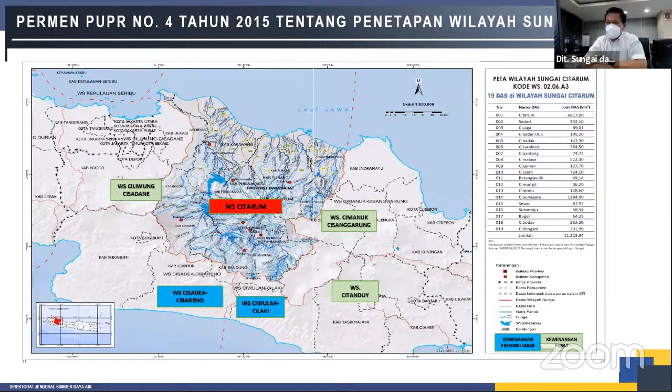Ini adalah wilayah sungai yang ada di Jawa Barat. Kita mempunyai 6 wilayah sungai di Jawa Barat, dan wilayah sungai Citarum adalah yang kita tulis di kotak merah. Wilayah sungai ini memiliki 19 das. Di wilayah Sungai Citarum yang merupakan kewenangan Balai Wilayah Sungai Citarum itu memiliki 19 das, dan di situ ada banyak sekali sungai-sungai mulai dari hulu sampai di hilir.

Di das Citarum atau di wilayah Sungai Citarum itu terdapat potensi air yang cukup besar, yaitu potensi air Sungai Citarum kurang lebih 12 miliar kubik per tahun, namun yang dapat dimanfaatkan hanya 7,65 miliar per tahun dan terbuang ke laut 5,3 miliar per tahun. Untuk 7,65 miliar meter kubik per tahun itu sudah digunakan terutama untuk penyediaan air baku perkotaan lewat bendungan-bendungan yang ada, kemudian lewat intake yang dibangun untuk air baku, kemudian ada pembangkit listrik, kemudian penyediaan air irigasi untuk kedaulatan pangan, kemudian kegiatan perikanan dan kegiatan olahraga dan wisata.

Kita tahu bersama bahwa di Sungai Citarum ada 3 buah waduk, yaitu Waduk Jatiluhur, Cirata, dan Saguling. Keberadaan 3 waduk ini sangat berguna terutama untuk pengendalian banjir di daerah hilir, sehingga di daerah hilir itu air dapat terkontrol melalui waduk-waduk ini. Selain itu di daerah hilir juga mungkin perlu ada penanganan waduk yang lain. Nantinya sementara dikerjakan dan sementara difinalkan untuk desainnya adalah Waduk Cibeet, di mana Waduk Cibeet itu nantinya akan meredam banjir di daerah Bekasi dan daerah Karawang.

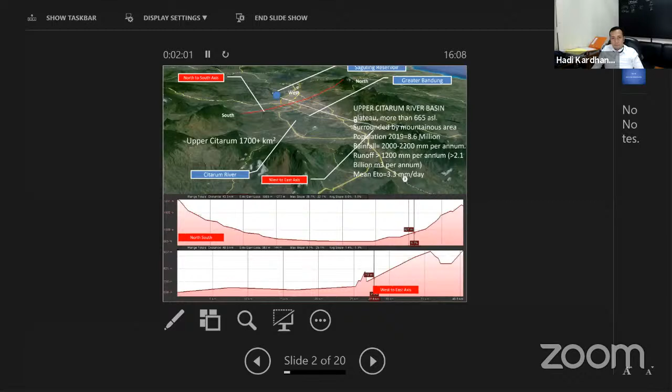However, there's some concern about this optimistic assessment, which I will explain later on. So regarding issues, Pak Bob already mentioned about the problem in Citarum, but I will make some short problem statement from the technical point of view.

I think we can identify about 5 problems in Citarum, especially in Upper Citarum. The first one is poor water quality. In Upper Citarum, we don't have a city or local sewer system, and this alone causes so much problem in our river system.

And in industries, in the agriculture, in the farming, also we don't have enough wastewater treatment plant. So this adds more problem. Besides that, we have also solid waste problem, and we don't have any sufficient program for sustainable agriculture.

So critical land appears everywhere, causing erosion that contributes to sedimentation in Citarum. And flooding - Pak Bob already mentioned much about this one, but I think the solid waste and sediment also cause additional problems for our river system, because if we design to a certain design capacity, it will be disrupted in no time. So we have to invest more in operation and maintenance to maintain the capacity. And this is also worsened by substandard design parameters.

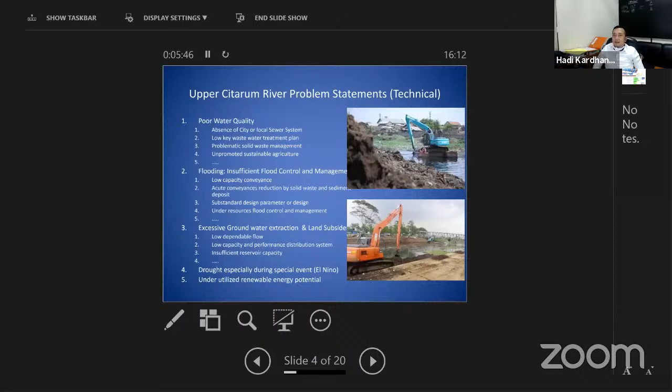And later is insufficient reservoir capacity. I think the major capacity in Upper Citarum is Situ Cileunca, about 10 million cubic meters, and it's already very old, I think around the beginning of the 20th century. And the drought and underutilized renewable energy potential is another problem statement, I think.

To address the water quality, the government has already placed a big project called Citarum Harum, planned until 2025. It's a very ambitious project, requiring almost 16 trillion rupiahs. But during the pandemic, I think the progress is not as expected. It has a very structural design with 3 policies, 5 strategies, and 13 programs.

It's all odd numbers, yeah? And all programs are cross-cutting issues, not handled only by the Ministry of Public Works, but dealt with by all ministries in Indonesia. But I will highlight only 3 cross-cutting issues: critical area, solid waste treatment, and water management. Because in these three cross-cutting issues, one sector is very dominant, which is the Ministry of Public Works.

So I think we have a good plan, but the question is how we implement this plan. And the outcome is to address the pollution index. If we categorize the water, we have a target until level 2 of water quality. This is quite an ambitious target, but we have to try to achieve it.

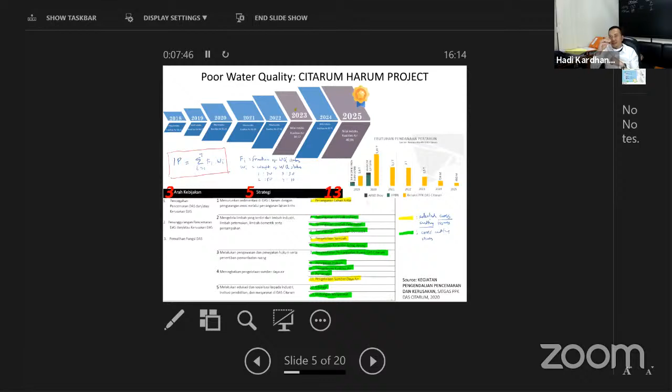For addressing the issue of critical land that contributes to sedimentation, we only have progress of about 6.5% right now. And as you can see, we have many agencies dealing with this program.

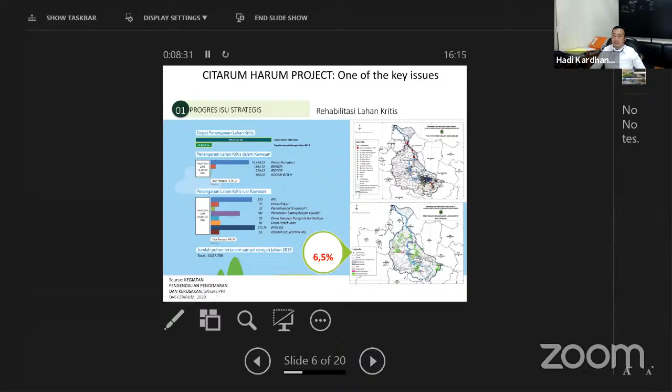I think we have a pessimistic assessment for this progress. However, we still have some hope once the pandemic disappears, hopefully. This is some snapshot of the progress - this is only a snapshot because the cleaning of the water body is already underway, and we have seen some progress. But we all know that the source of this pollutant is in the upstream, so we not only have to deal with the cleaning, but also address the upstream sources.

Okay, and regarding flooding in Citarum, we can see that a higher extreme frequency is expected.

During the 70s and 80s, if we design canal or flood control infrastructure by 10-year return period, it became 5-year return periods in the 90s and 2000s. This led to outdated construction design parameters, so our old structures already lack the capacity as originally planned, giving more problems to our infrastructure.

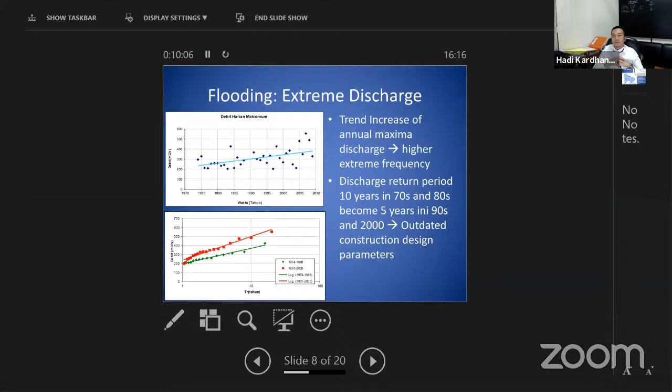These figures are from Irwan et al. 2015, our colleagues from the Faculty of Earth Science, showing that groundwater extraction and land subsidence is quite severe in this area. It can exceed 1 centimeter per year, and in one area it can reach 2 meters over an 11-year span. It's a big problem because it causes additional flooding issues, since the land decreases and flooding increases.

Besides land subsidence, the groundwater table is also decreasing, in one point reaching about 1.79 meters per annum. This is severe because our dependable flow is very low during dry season. However, groundwater extraction is not the only cause of land subsidence; there is also evidence that natural compaction occurs in this area, which adds to the flooding problem.

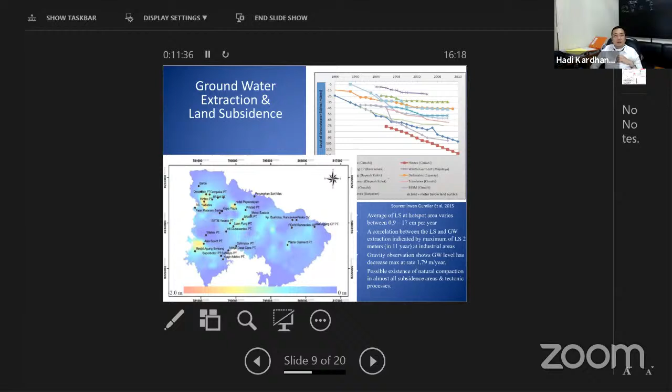For dependable flow, in the past we had less water than now, both during high flow and low flow. During high flow we expect more discharge, and also during low flow. However, during low flow we only have about 10 cubic meters per second of water for 90% exceedance probability, which is barely enough for domestic purposes. If we have about 8.6 million people, we need about 5 cubic meters per second of water, and based on these figures about 20% of the time will not achieve or exceed that figure.

So people tend to draw water from groundwater, and our pipe network covers only 30% of the area with losses of about 40%. If we supply 15 cumecs with 40% losses, we need more supply at our intakes because of this low dependable flow. These are the figures that need to be evaluated and become our baseline before setting efforts to deal with the problems.

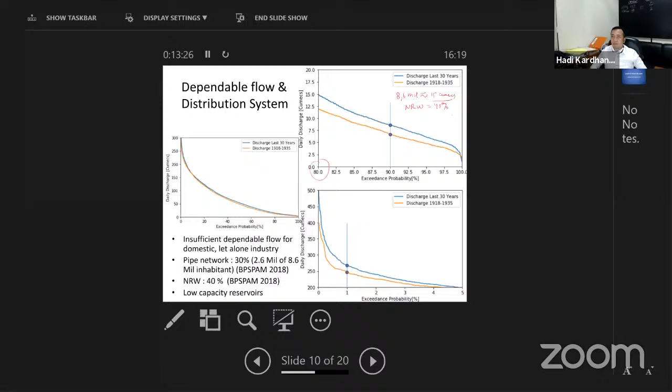For the second part of my lecture, I will share some snapshots of research in the Upper Citarum River Basin. Most of this research was done by our students, so if participants here are students, you will make one of these. I'll share a few of these research studies with you.

In 2016 in the Bandung area, because we see low dependable flow, the strategy is to increase reservoir capacity. We don't have enough resources for a large reservoir and no site to build one, so we can encourage people at home to build their own reservoir. Based on this system, if we have a 2 cubic meter reservoir at home, and about 4% of homes adopt this, then from our rainfall conditions in Bandung we can have about 65% of needs filled by rainwater.

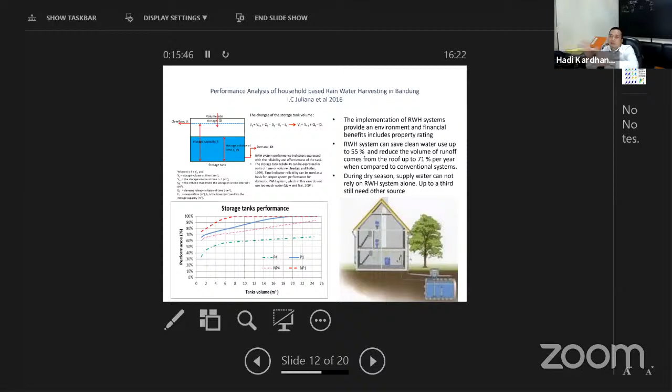The second research, I think from Mr. Asep 2020, is from MPSDA. Pak Asep deals with non-uniform rainfall. As you know, during floods in the Upper Citarum River Basin, it's not only uniform rainfall causing flood, but non-uniform rainfall also causes flood, and our rain gauges sometimes cannot cover those rain systems.

This non-uniform rainfall also causes the time to peak to vary from time to time, so we need a good approach to estimate the discharge. We propose that some parameters need to be included in the time lag calculation, which we call rainfall moment, basically the distance between the outlet and the rainfall storm cell. Based on this, we can modify the time to peak of the hydrograph.

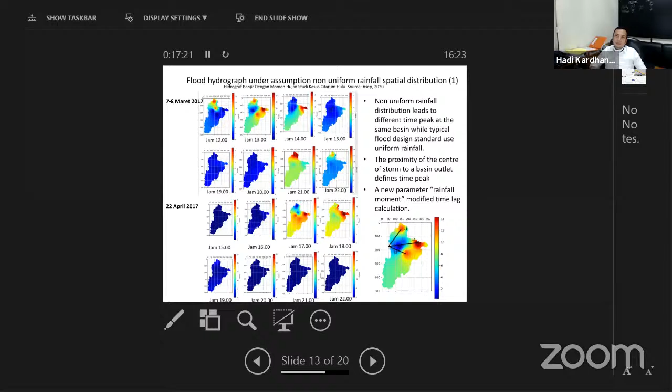We can increase the performance of hydrograph estimation by incorporating non-uniform rainfall, improving estimation in terms of time to peak and magnitude of peak discharge. This gives good estimation for setting up a flood early warning system based on a simple approach that incorporates time to peak.

The other research was done by master students from civil engineering dealing with the nonuniformity of rainfall. We used reanalysis rainfall from global data and compared it with the rain gauge network from BMKG. We found similarity between the rain gauge network and reanalysis precipitation, but we need to adjust the reanalysis data with our ground data. Then we can use the data for other purposes. We believe that with proper treatment, reanalysis precipitation data can be very useful for relative or global purposes, though we cannot use it for design purposes.

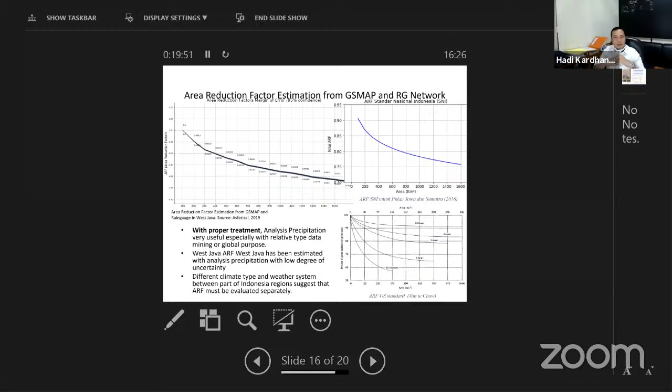In this research, we developed the ARF for the whole West Java with a low degree of uncertainty, and compared it with the standard in our SNI, as well as with the US standard. But we included our own characteristics in Indonesia, so we cannot use it for other parts of Indonesia, since Indonesia has different climate characteristics and weather systems. This work was done by Mr. Asferizal, 2019.

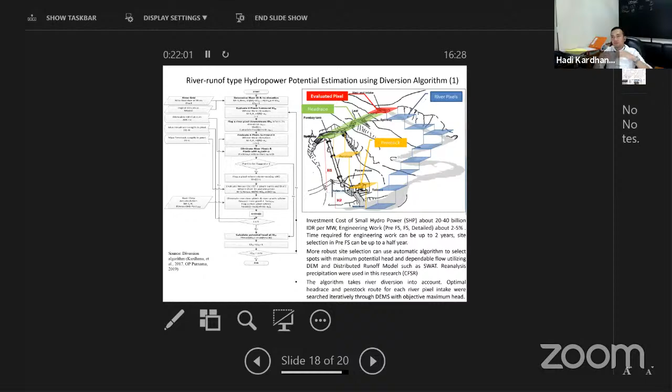The last one is from Mrs. Olivia, 2019, who also did studies in Upper Citarum. She developed an algorithm to find hydropower potential. The algorithm is automatic, based on DEM, digital elevation model, and it incorporates river diversion. If we input the DEM and the data of dependable flow for each river pixel, we can extract which location has the biggest potential, then filter it based on feasibility criteria, and compare it with existing hydropower. Her estimation is quite good, because some existing hydropower can be estimated based on her algorithm. I think this algorithm is an innovative way to find renewable energy potential that can be applied in other parts of Indonesia. We have about 99% electrification ratio, meaning 1% of our people don't have access to electricity, mostly in mountainous areas. Based on this, we can estimate which areas could be potential for building hydropower.

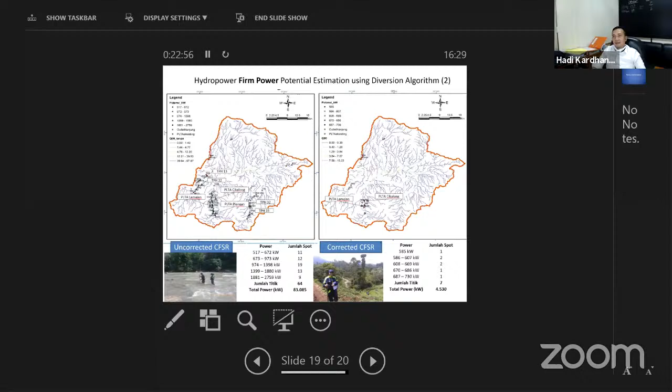So I think there's several pieces of research that I would like to share with all participants and colleagues from the Netherlands, and I hope this will be useful for you all. Thank you for your kind attention.

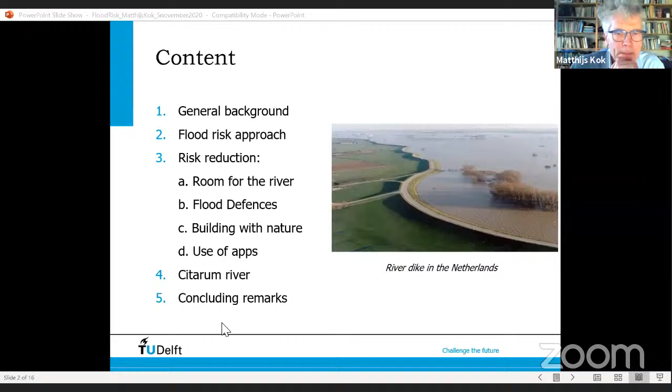What we see in general about floods is worldwide increasing damages. And that's not only because of climate change. I think it has less to do with climate change, but more to do with the number of people who live in floodplains, in potential flooding areas, and in delta regions.

We see a lot of economic growth, and I think economic growth is a good thing because it gives more wealth to people, but it also has a negative side if the factories and houses are in vulnerable areas.

My basic concern, because I'm a professor of risk, is what to do with the risk. Do you accept it? Of course, zero risk is almost impossible, so you have to accept some level of risk, but what level do we take? And if you don't accept it, you have to take action.

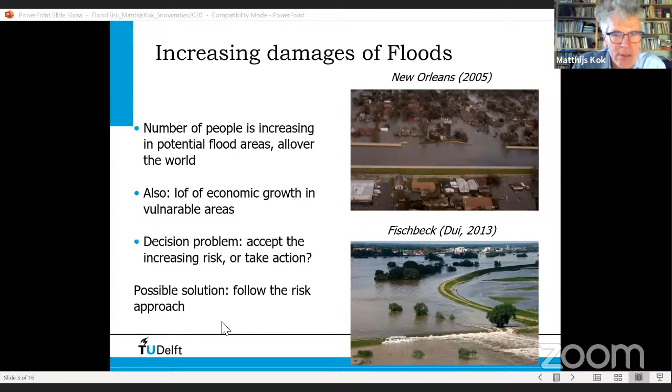One possible approach, which I teach to my students, is that we follow the risk approach. So what is the risk approach? Basically, you see the risk approach everywhere, all over the economy, in many sectors.

Flood risk also follows the classical risk approach: first we have to assess the flooding probabilities, mainly the return periods of discharges and water levels. But if you have flood defenses, you also have to take into account that they will fail given a certain discharge. So that's a combination of the hydraulic load - discharges, water levels, waves - and the strength of flood defenses, if there are any, and also reservoirs if present.

The next step is the assessment of the consequences - loss of life, economic damage, it can be many things. And if there is no damage, you almost have no problem.

The third step is to see what kind of risk is in the area, and what measures you can take to reduce it. You have to assess the impact of these measures on the risk level, but also other impacts, such as ecological impacts. Often it will cost a lot of money, and you don't usually have enough budget to take them all, so we have to set priorities. That's the typical decision level: what measures to take, accept the risk level, or reduce the risk.

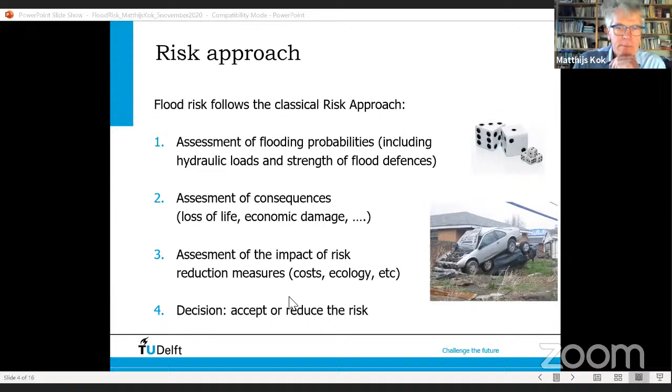One of the main important questions is, of course, what is acceptable and for whom is it acceptable? In my risk approach, it always depends on the consequences of the flood. If there are few consequences, you can accept the risk, but if there are many damages, you have to reduce the risk.

It also depends on the policy. Some argue that we have to live with floods, and I think we do. We have to live with floods, but we can also take measures to prevent floods as much as possible, or to a certain extent, because it also has a price. In the Netherlands, we have the approach, and still have the approach, that we prevent floods as much as possible, because of the high consequences.

You may know that part of the Netherlands is below sea level, and another part is also subject to river floods.

There are many ways to reduce the risk of flooding. I will give you some clues, not a full overview because that's impossible in 15 minutes, but I can show ways to reduce the risk, and of course there are many more, and it has to fit the area. So I want to show some examples in this presentation.

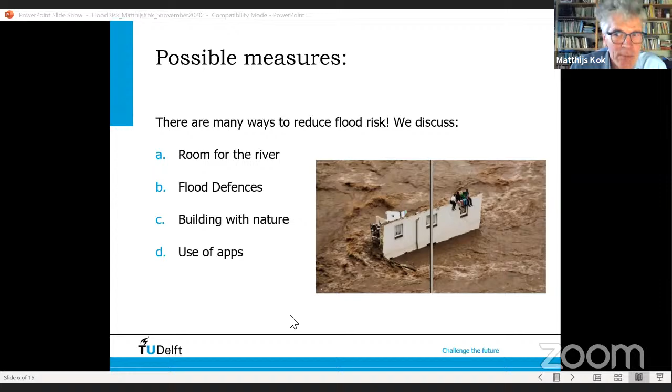I want to show you the room for the river approach, as we have followed this in the Netherlands. I also will tell you about flood defenses, the way we cope with that traditionally. What's quite new is that we have approaches called building with nature, so that we use nature to reduce flood risk. And finally, we also use apps to make people more aware of where floods can happen.

Well, the first thing is room for the river. Here you see an overview of what is meant with room for the river. Basically, it says that if you have a floodplain with possible flood defenses, you can increase the area of the river.

You can relocate dikes, make side channels, lower the level of the floodplain so water levels go down, build what we call a green river with an extra side channel, reduce the height of groins if there are any, and reduce obstacles. So there are many ways to have more room for the river.

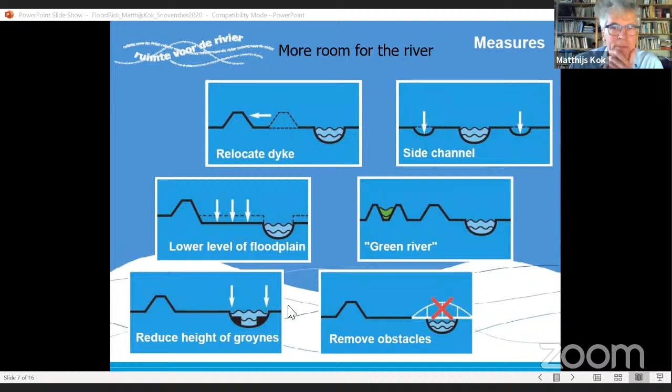And that's important. Of course they are compensated by the government, but still it is a high price to pay. Well, then the next slide is about flood defenses.

This is not common in the Netherlands, I think not common everywhere, but what can be done is that you build flood defenses of glass. The advantage is that people still have the view over the river, but are still protected. Of course, the strength of the glass has to be enough.

What we did last year at Delft University, we made some tests about the strength of glass to have these elements as part of a flood defense system in the Netherlands. But of course, this is quite exceptional.

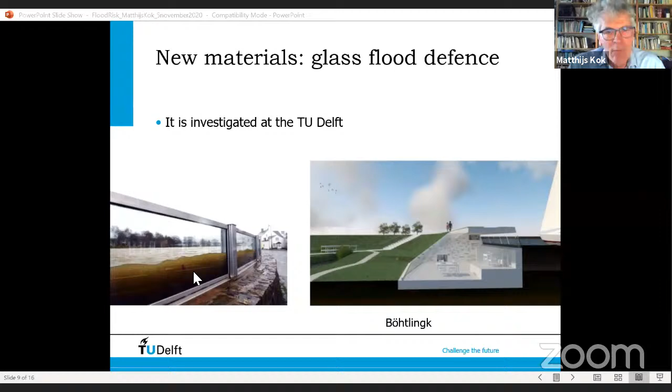What is more traditional is to build sheet piles in dikes. So you have an earthen dike, but also you put an element of a sheet pile in it. Traditionally, the strength of the flood defenses was calculated without the soil of the dike. And what has been done a few years ago, with a PhD thesis now being written, is an experiment about the additional strength the soil gives to a sheet pile in a dike.

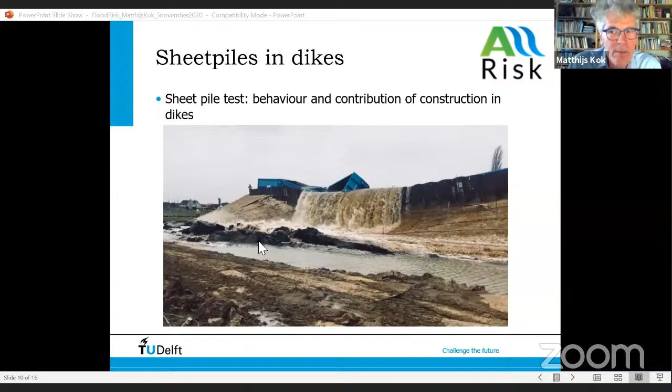These are very big tests, a real life test, with sheet piles more than 4 or 5 meters above the soil. So this is a very huge test, and also, of course, very costly. But I think it's worth the money because you get a lot of new knowledge from these tests.

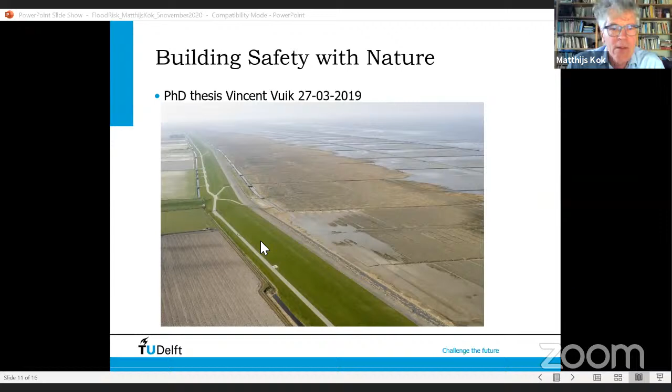Well, another approach is building safety with nature. This is from a PhD thesis last year by Vincent Vuik. Here you see a coastal area, and what can be done is use the floodplain area. This is the green dike, and this is the sea, where of course there is a tide which goes up and down.

What you can do is let the vegetation in this area before the dike reduce the waves and the flood levels. The question is how much does it reduce, and is it stable enough? Because if there is a storm and the vegetation is all gone, you don't have any reduction anymore. So this has been thoroughly investigated, and the good news is, well, there is some.

And it reduces the flood waves, but of course that doesn't mean you don't have to build dikes anymore. You still need the dike to prevent flooding, but it can be lower than the traditional design.

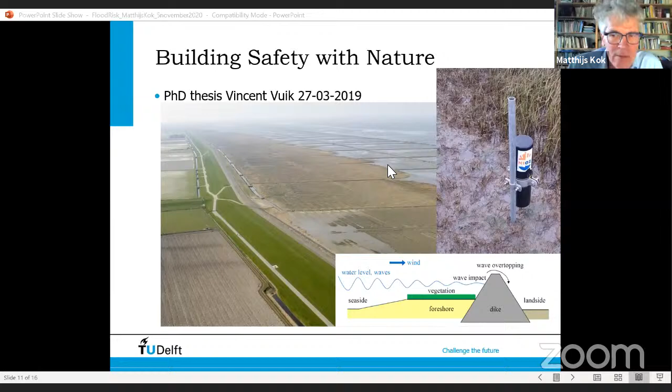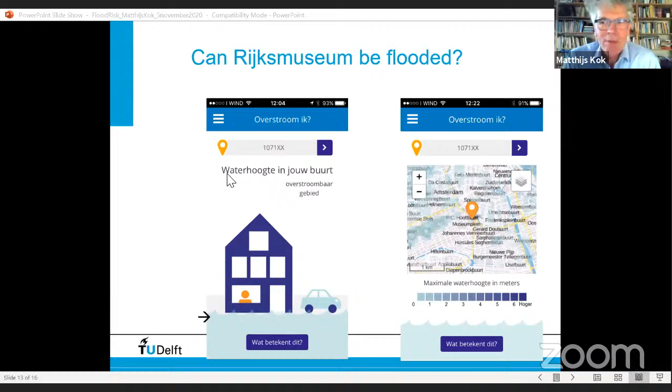And of course, the big question is, if there is climate change, will that still be the case? To give you another example, I also work at a company in the beautiful town of Lelystad, named after the Dutch Minister of Public Works, Mr. Lely. If you look from that office, it can be flooded, and the water depth can be 3.5 meters, so the ground floor and also the first floor will be flooded. But we also have a second floor, so we can still work there. That's a joke though, because if it's all flooded, you cannot access the building anymore. But it gives an impression of what the impact of a flood can be.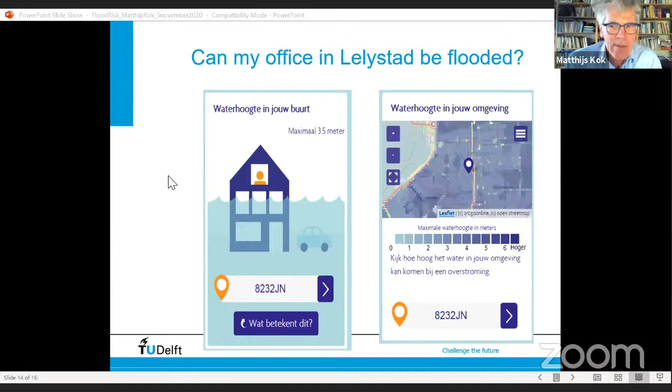And that, of course, raises public awareness, which I think is also quite important.

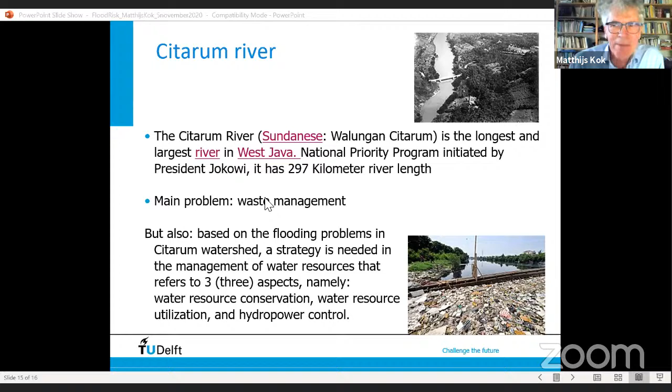Then one slide about the Citarum River. I'm not a specialist in this, and you've heard a lot about it already, more than I could tell you from previous lectures. But of course there are water quality issues, and also flooding issues, and I think it's very worthwhile to strengthen the relation between Delft and you to investigate all these issues.

Then my concluding remarks: I think floods will be a challenging issue also in the future, because of climate change. We've heard a lot about it. We also hear a lot of fake news about climate change, but it does happen, it will happen. The only question is when and how much, and that's a very important question.

I think we also see a tendency in the Netherlands that people want to live in areas which are quite vulnerable to floods, like the western part of the country, in Amsterdam, Rotterdam, Delft, and The Hague. People really want to live there, while the eastern part, which is relatively high, is not as popular. So huge economic losses can happen, also loss of life, but the good news is that it can be reduced by taking appropriate measures.

Pak Eelco, this was my presentation.

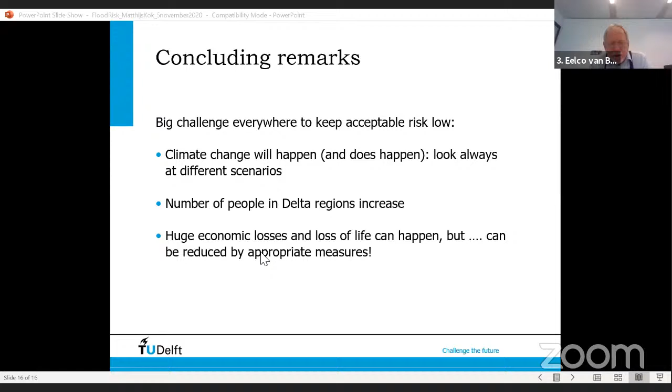Thank you, Matthijs, for this nice overview of the risk approach that we follow in the Netherlands. Maybe some of the things you mentioned give nice inspiration, for example the nature-based solutions, which can also be used to address the problems in Indonesia. I know the mangroves on the north coast of Java are also being applied, but the inspiration may also be relevant for the competition that we'll explain at the last part of this webinar.

Yeah, thank you, Pak Eelco Van Beek, for this opportunity. Can you hear my voice clearly? Yes, we can hear it and we see your screen. Thank you. Okay, first of all, thank you also to BTHF for inviting me to this very interesting occasion.

My name is Ira Wardani, and I've been working at Deltares since 2018. I have some work experience regarding water quality model development, especially for the Citarum River basin. So within this opportunity, I will give a presentation about the topic of water quality models as a new approach to assist water quality management tools.

So this is the content of my presentation. First, I would like to emphasize the emerging needs of water quality models. So how we perceive water quality problems, we have a change of paradigm, a shift between the old paradigm and the new paradigm.

In the old paradigm, how we perceive water quality problems such as eutrophication, domestic pollution, industrial pollution, we usually only use sampling and laboratory tests to determine the water quality parameters, whether they are qualified or not, based on certain guidelines, above or under the threshold value.

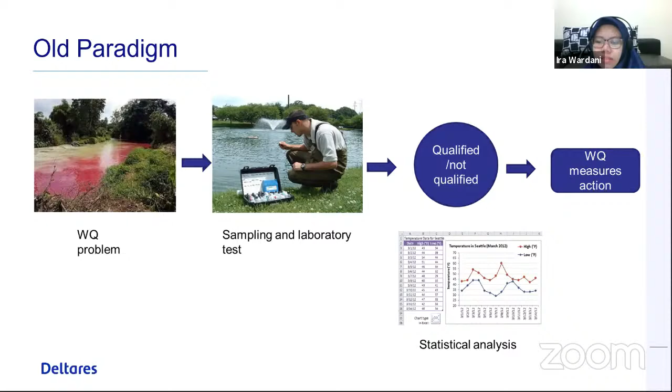But for the new paradigm, how we perceive the water quality problem, we see it becoming more and more complicated. There are a lot of emerging pollutants we still don't know how to assess. We're also facing problems like massive population growth, land use cover change, and climate change issues becoming more serious and of more concern.

And also massive economic growth is leading us to more pollution in the river. So we as scientists or decision makers must not only think about the current situation, but also think about what the situation will be in 10 or 100 years, and whether river quality status will still be good for our next generations.

And to answer those questions, sampling and laboratory tests are not enough. That's why water quality models are important and needed.

With water quality models, we can quantify or calculate the number of pollutants based on their source, how they can enter the river body, and we can simulate the amount of load or pollutants within a certain time period, like 1 year, 10 years, or 100 years.

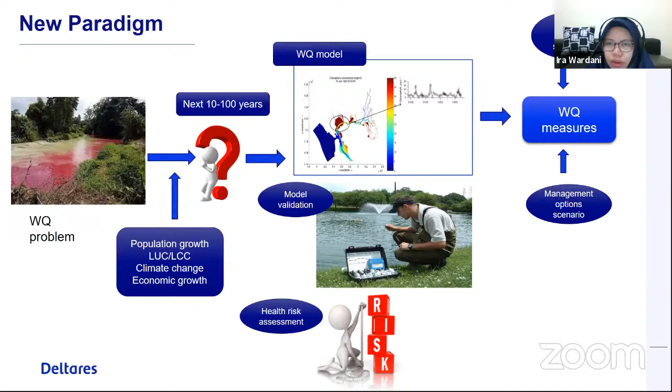Now I will discuss more about water quality tools. As I told you before about sampling and laboratory analysis, doing this for all pollutants is nearly impossible because it will be really costly and expensive, and we still lack facilities and resources to do that. For some parameters, we still lack technology development.

For example, in Citarum River itself, as I know, we have 3 institutions doing water quality measurements: PJT2 or Perum Jasa Tirta 2, West Java DLH or Dinas Lingkungan Hidup Jawa Barat, and Pusair, now called Direktorat Bina Teknik SDA, under the Ministry of Public Works. Those 3 institutions, if accumulated, only measure no more than 15 water quality parameters.

But in reality, we have much more than that. That's for sampling and laboratory analysis. For water quality models, we also have a lot of options for modeling water quality, and some water quality models are developed from hydrology models themselves. Some of you may already be familiar with HEC-RAS or SWAT, the Soil and Water Assessment Tool.

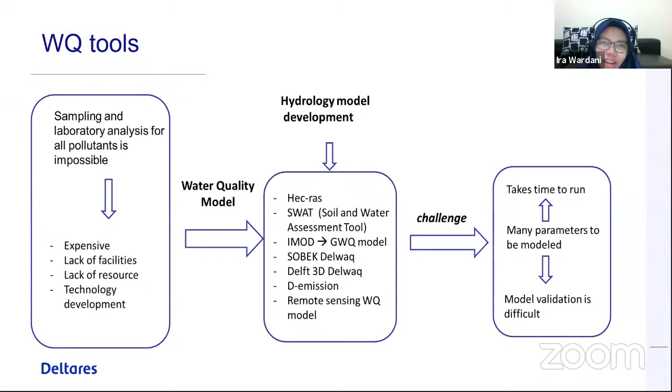To do these water quality models, we are actually still facing a lot of challenges because, as I said before, there are many parameters to be modeled, and modeling a lot of parameters for water quality really takes time to run. Model validation is quite difficult because we only have limited data available to compare to our model output.

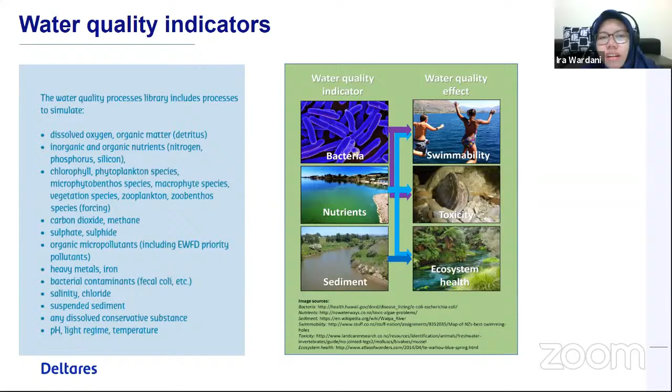Besides all the common pollutants, we also have a lot of new emerging pollutants. For example, pharmaceutical pollutants—especially now during the COVID pandemic, we still don't know how much pharmaceutical compounds or antibiotic residues enter our river system from hospital wastewater treatment plants. There's also a lot of personal care products and endocrine disrupting compounds that contain dangerous contaminants in our river.

There's also microplastics and persistent organic pollutants, which are really hard to degrade in the environment. If you count these emerging pollutants, there can be more than 200 of them. These pollutants still lack research and lack technology development to assess them. It's really limited in some countries, including Indonesia.

So how do we do the prioritization of water quality parameters in Citarum River? I found one interesting study from a West Java EPA staff member. He did his PhD at a university in Australia, and he did the prioritization of water quality parameters for Citarum River Basin.

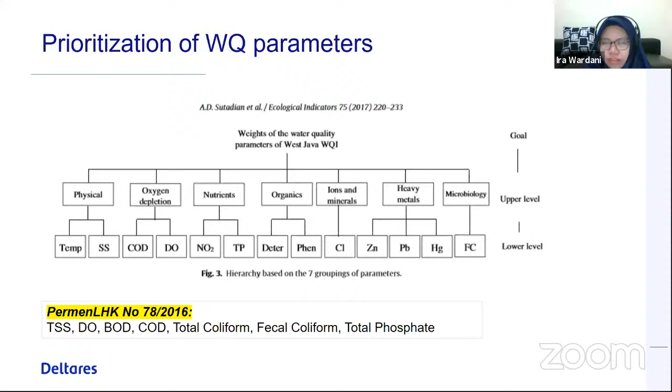The basis of the water quality model itself can be a rainfall-runoff model or a simple hydrological model, or it can be coupled with a 1D hydraulic model or even a 3D hydrodynamic model.

And then we also have a process library to calculate the emission of the pollutants, the transport model, and also the water quality model. So the options are based on the availability of the data and the resolutions that we need. To get more complicated results, we need a more complicated model.

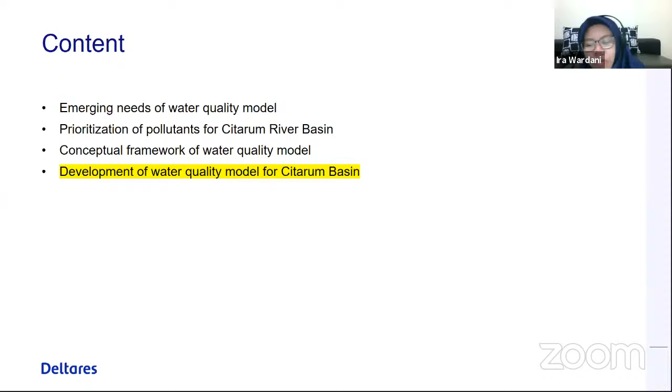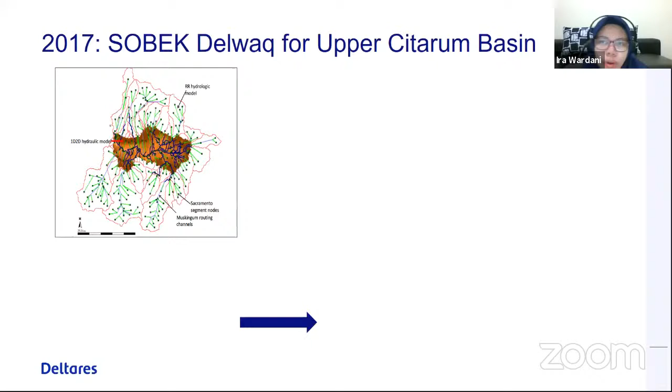In this slide, I will tell you about the development of the water quality model that we've done for Citarum River Basin. We started in 2017. We have the SOBEK Delwaq model for Upper Citarum River Basin under a joint cooperation project. All the activities related to the water quality model that we did for Citarum River are in collaboration with Pusair, water quality department from Pusair, or now we call it Direktorat Jenderal Bina Teknik SDA.

So we built SOBEK Delwaq for Upper Citarum Basin in 2017 based on the existing hydraulic model by Deltares in 2013, and we only used one parameter as a trial, which is E. coli, because it's quite common and the data for that parameter is available. The source of emissions that we put in the model are from the centralized wastewater treatment plant, from communal sewerage system, from the leakage of septic tank, and also from livestock background concentrations. And we divide the sub-basin into 5 river basins: Ciwidey, Cisangkuy, Cirasea, Citarik, and Cikapundung.

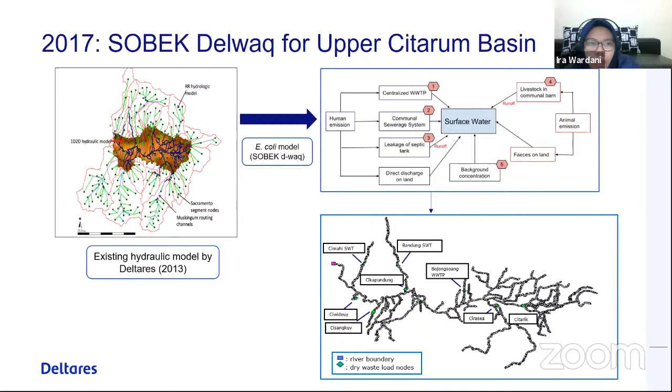We also applied some management option scenarios. The first scenario is the reference or baseline scenario, business as usual, where you cannot change anything. The second management option scenario is what will happen if we do the improvement of the wastewater treatment plant. The third scenario is what will happen if we increase the connection to the septic tank. And the fourth scenario is how it will be if we improve the livestock management.

Then in 2019, we tried to introduce a new model for water quality because, based on our evaluations, the previous model, the SOBEK Delwaq model, is not really user-friendly. So if you find an error, it's really hard to fix the model. And since it's based on hydro, it's quite costly, hard to validate, and really difficult to build the model from scratch.

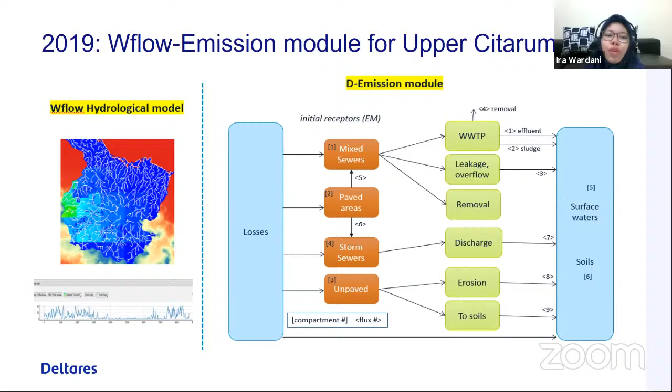So this is the overview of the result that we get from the coupling of Wflow and the emission model for Upper Citarum. The result is given at the kecamatan level.

The results show that the highest coli concentration contributors are from the highest population density areas. Also, for the nitrogen concentrations, it comes from the livestock area, which is Pengalengan and Pasar Jambu. And for the highest organic carbon concentrations, it's located in the main industry area, which is Majalaya.

We also already introduced our model, Wflow and the emission model, to the stakeholders of the Citarum Harum project. We did a focus group discussion and an expert panel about the model. It was quite well received within the stakeholders, and they might want to use it to support the Citarum Harum project and quantify the water quality indicators.

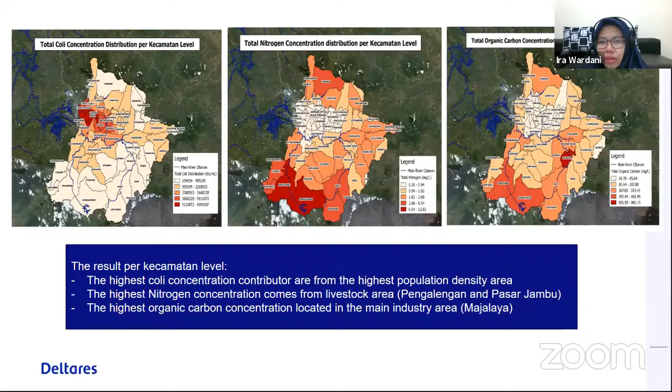And then this year, in 2020, we also introduced a new development of the emission model for the Upper Citarum Basin, because as you can see here, the result is at the catchment level, but Pusair, or our Indonesian partner, want to see the result also at the river segment level, and want to see the result not only as a load, but also in concentrations, because they have the observation data in concentrations.

So if we have the observation data in concentration and model output also in concentration for a river segment, it will be easier for us to do the calibrations. So the new version of the emission model can calculate the pollutants as fluxes or as a load expressed as mass per time, and also as a concentration expressed as mass per volume.

And the new setup model contains 5 variables, which are coliform bacteria, total nitrogen, total phosphate, total suspended solid, and also biological oxygen demand.

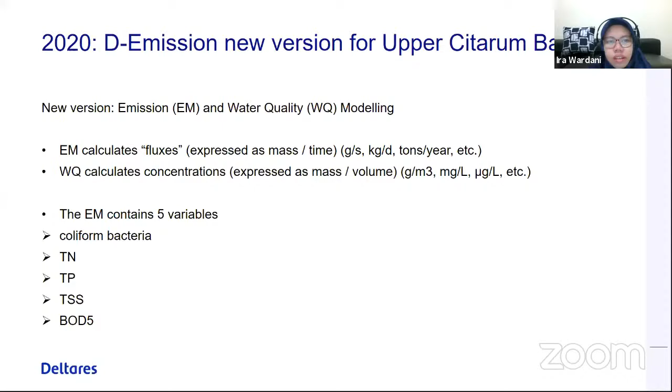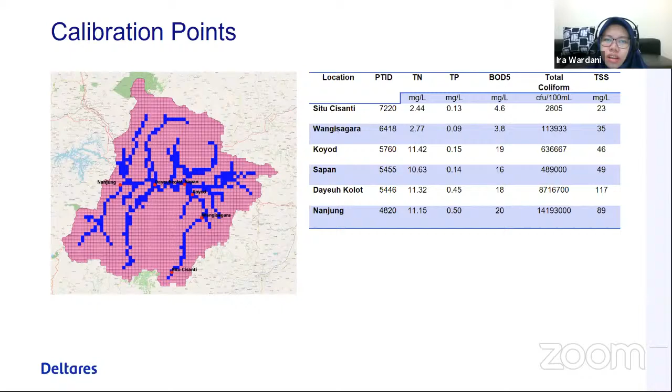And these are the calibration points that we use to calibrate our model in 2020. So there are 6 points: Situ Cisanti, Wangisagara, Koyod, Sapan, Dayeuh Kolot. The observation data comes from PUS Air staff, and they also have measurement data for 5 parameters that we simulate in the model, which are total nitrogen, total phosphorus, BOD5, total coliform, and also total suspended solid. And then we compare this measurement data with our model output, as well as the output of the calibrated model in 2020.

Yeah, I'm quite happy with the result because the order of magnitude seems quite logical.

And then besides, we also applied a simple management option scenario. We can develop it more for the management options. We applied one management option scenario: how if we increase the efficiency of the wastewater treatment plant? So the baseline scenario is the business as usual scenario, we don't change anything. And the best scenario is what will happen if we increase the efficiency of the wastewater treatment plant.

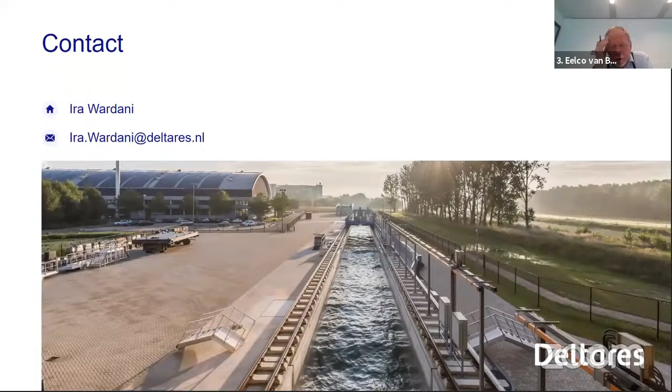Thank you, Bu Ira. Yeah, that's all I think. Thanks so much also for this overview of this paradigm shift. That's important what's going on, and the evolution that you show in using models for water quality study. I saw there is already a question about this in the chat, and maybe you can answer that if we have time afterwards. Also, what you mentioned might be a nice inspiration for the competition.

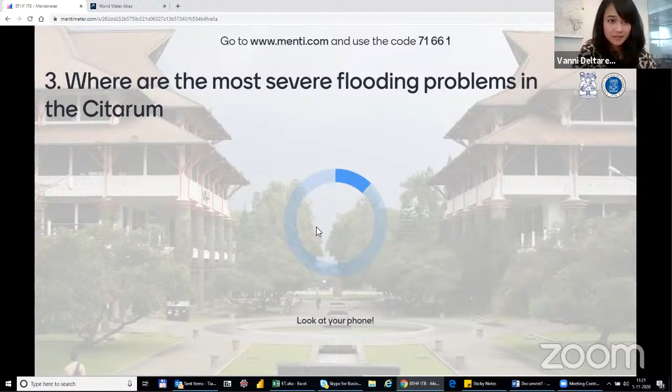Now let's see, where's the top? Okay, Jonathan is very fast. Let's go to the next question, the third question.

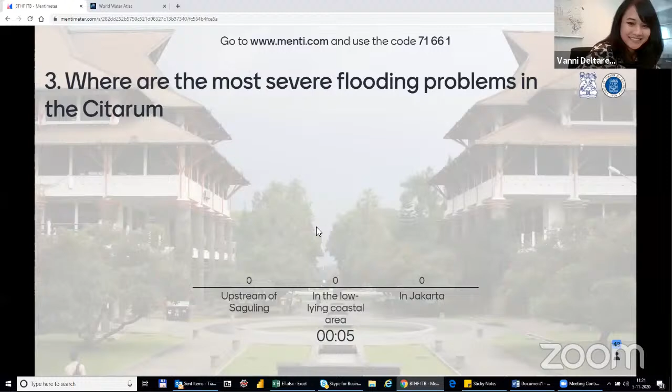Be ready. What is the most severe flooding problem and where in Citarum? Be careful, this is a bit of a tricky question. 5, 4, 3, 2, 1. Very good, okay, I think most of the ITB students are actually giving the correct answer, this is a very good start. Well, Jakarta is not in Citarum.

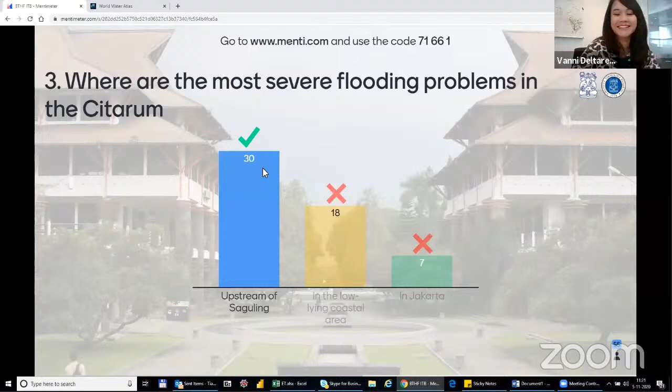Let's go to the next questions and see first who is the winner now. Oh, Jonathan is very fast, still on the top. Okay, let's go to the next one.

Question 4. What is the main cause of flooding problem in the Bandung Plain? Is it climate change, soil subsidence, or deforestation? Unfortunately, the main problem is deforestation.

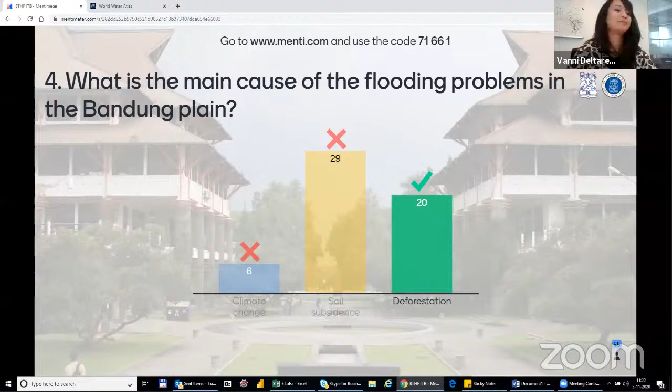So this is the last question, and let's see who is on top. Okay, seems like Jonathan leads very high, and then there is Thibaut and Aaron after. So this is the last question.

This will be the final, and you will know soon whether you get the prize or not. What is the W-flow model? It is a model from Deltares. 7, 6, 5, 4. Okay, the correct answer is hydrological model - it transfers the rainfall into discharge. Very good, now let's see who is the winner, let's see who is the top 3.

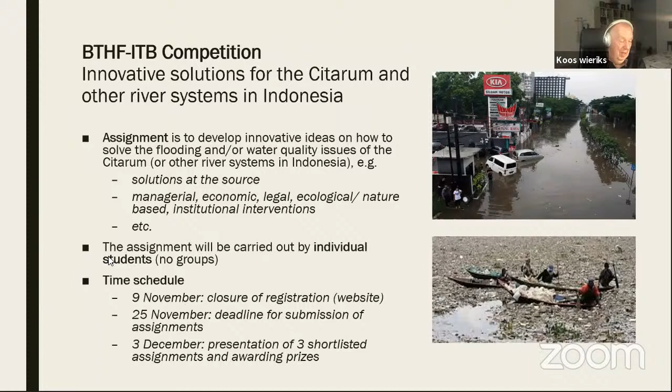In the next session, let's move back to the next slide again, Eelco. In the final session, the top 3 will be asked to present their ideas in the next webinar, and that will be on December the 3rd. We have a sort of jury evaluating all the assignments that we receive.

The judging panel will be Dr. Hadi Kardana, Professor Eelco van Beek, Dr. Rino, and myself. We will use the following criteria: originality, effectiveness, efficiency, implementability, sustainability, and the way you present it. For the best three, we have nice prizes: 10 million, 7.5 million, and 5 million.

And now that should also stimulate you. But I think what even more would stimulate you is that you, with your contribution, can maybe add to the solution of the problems in the Citarum area.

So far, Eelco, thank you. Okay, thank you, Koos. This is clear, I guess. Important is that you register before Monday, and you can do that through the website that you just saw, the same website you use to register for this webinar.